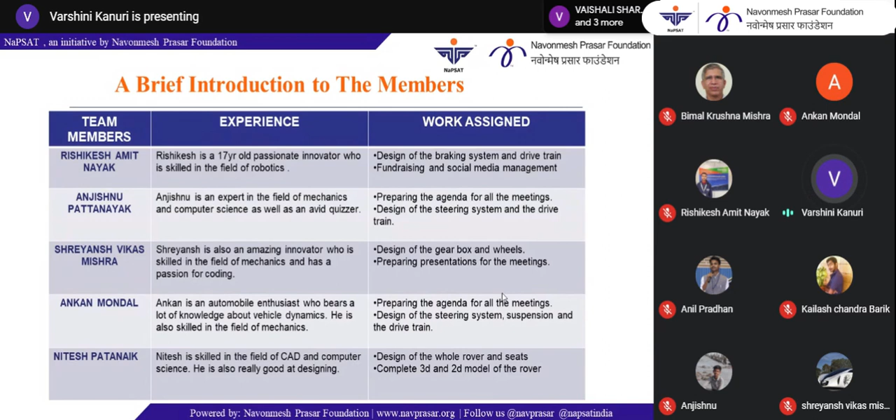Dati Danda Pani Patra. Dati Danda is skilled in the field of mechanics and vehicle dynamics. He is an expert in welding and fitting. Currently, he is designing the framework of the rover along with researching about the material suitable for the rover.

Kailash Chandra Barik. Kailash is also an expert in welding and fitting. He too is knowledgeable on vehicle dynamics and mechanics. Currently, he is designing the framework of the rover along with researching about the materials suitable for the rover.

Tanvi Mallick. Tanvi is an innovator who is experienced in the field of robotics. She is an orator as well. Currently, she is preparing the presentations for the official and unofficial meets, along with communication with the other teams.

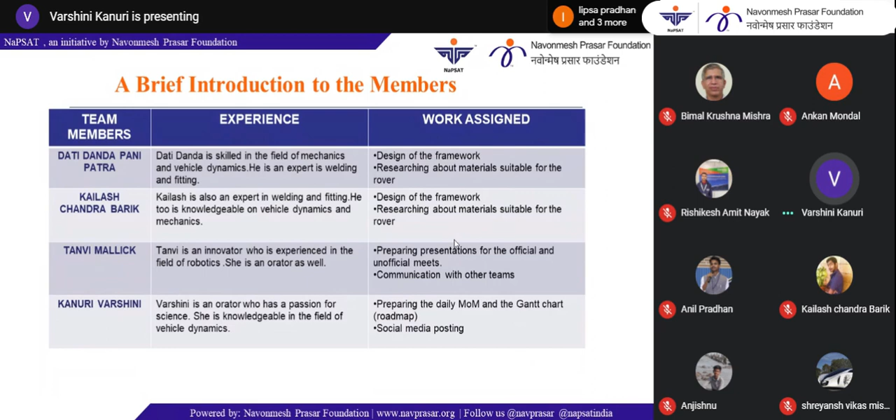Lastly, it's me, Kanuri Varshini. I'm an orator who has a passion for science and astronomy. I'm also knowledgeable in the field of vehicle dynamics along with some components like gear and wheels. Currently, I'm preparing the daily MOM and the Gantt chart along with social media posting.

So here's a list about the team's requirements along with NASA's requirements. Starting with our requirements: weight 127 pounds, folds 3, brakes 4, assembly time to be determined, turning radius 13 feet, fender 169 square inches, seat belt airplane-type waist seat belt.

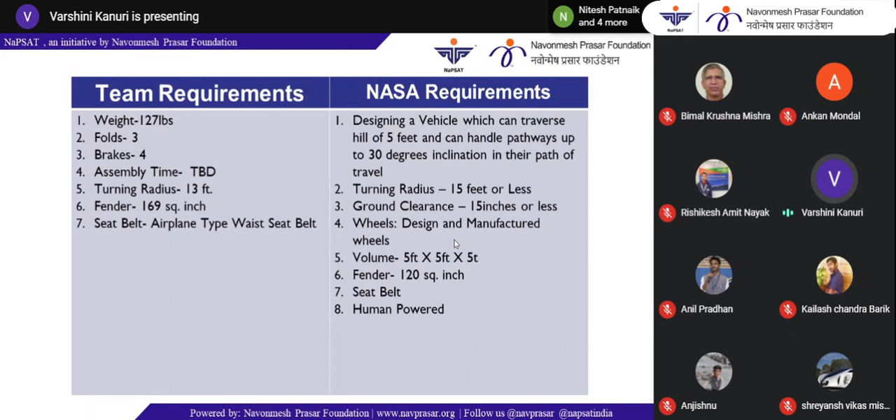NASA's requirements: designing a vehicle which can traverse a hill of 5 feet and can handle pathways up to 30-degree inclination in their path of travel. Turning radius 15 feet or less. Ground clearance 15 inches or less. Wheels designed and manufactured ones. Volume 5 by 5 by 5 feet. Fender 120 square inches. Seat belts, and must be human powered.

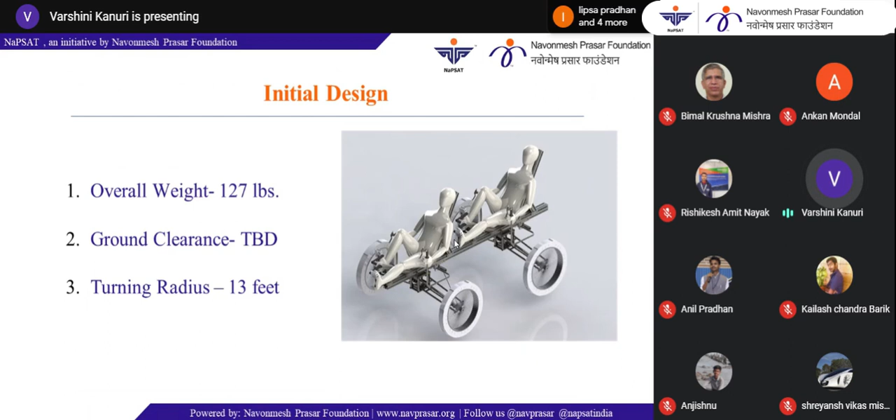So here's the picture of the initial design of our rover, along with the overall weight, ground clearance, and the turning radius as discussed earlier.

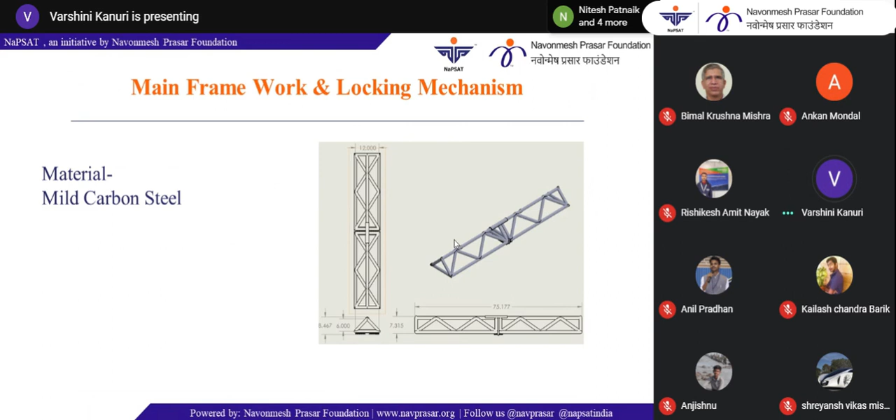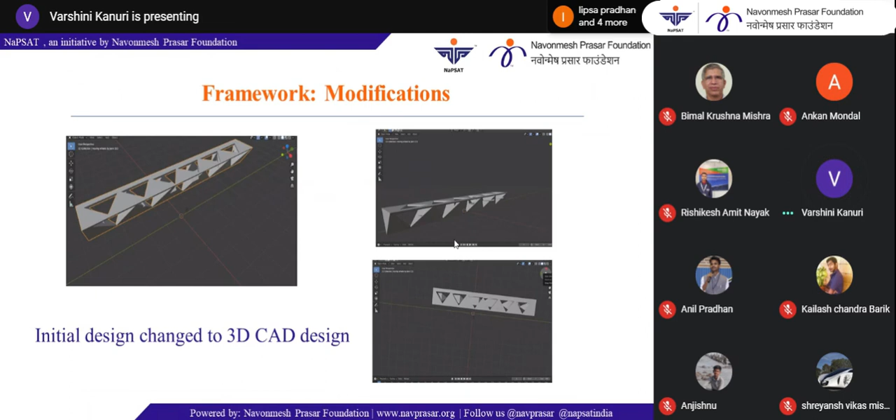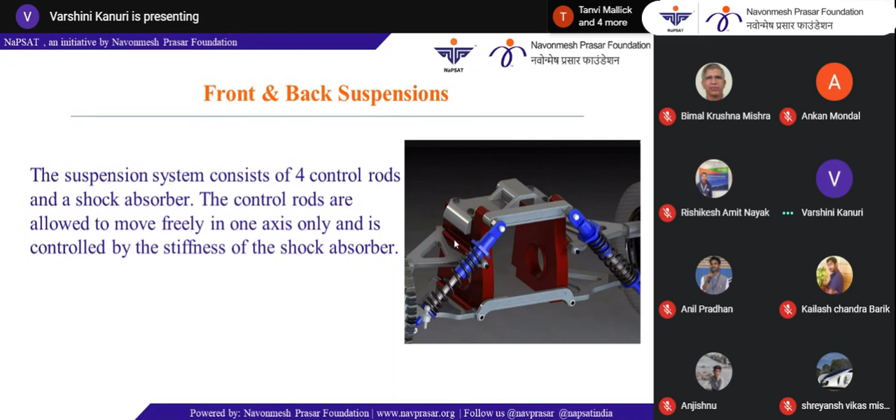Front and back suspensions. The suspension system consists of 4 control rods and a shock absorber. The control rods are allowed to move freely in one axis only and are controlled by the stiffness of the shock absorber. A picture of the suspension system has been displayed in the PPT.

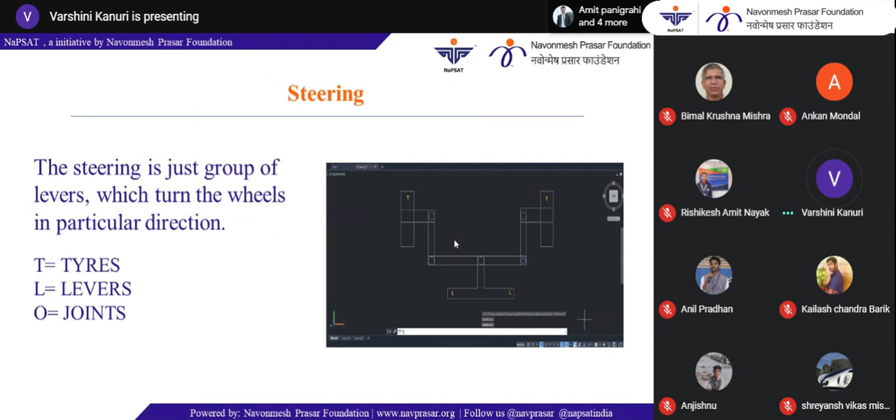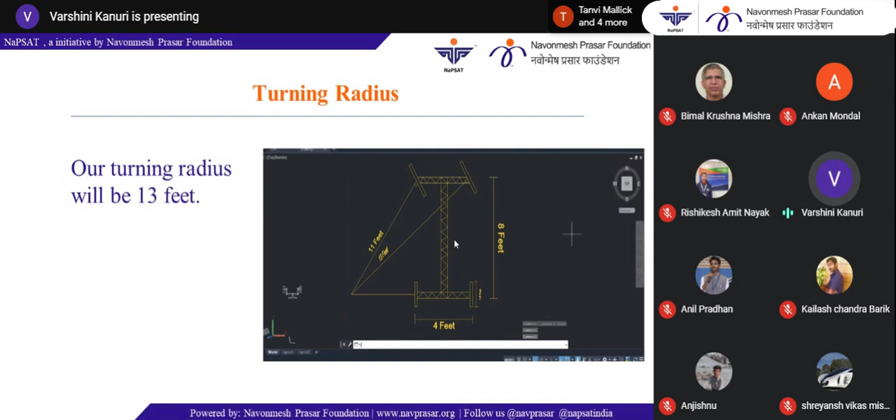Steering. The steering is just a group of levers which turns the wheels in a particular direction. As described in the picture, the letters T denote tires, L the levers, O the joints that are to be fitted into the rover. Our turning radius will be 13 feet. A calculative measurative picture has been displayed here.

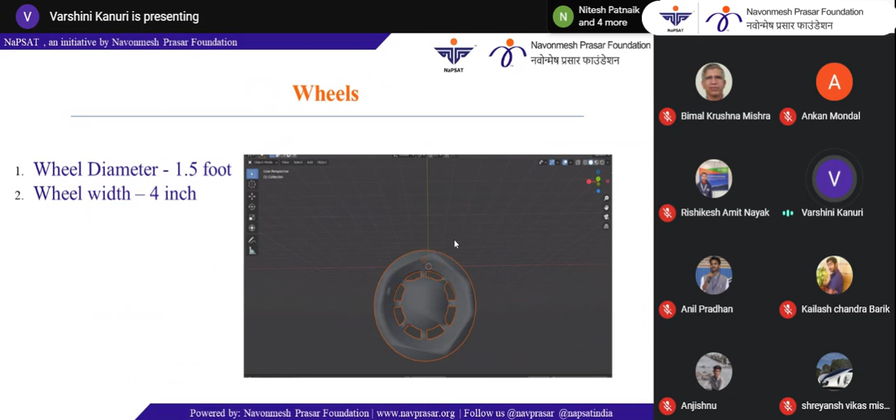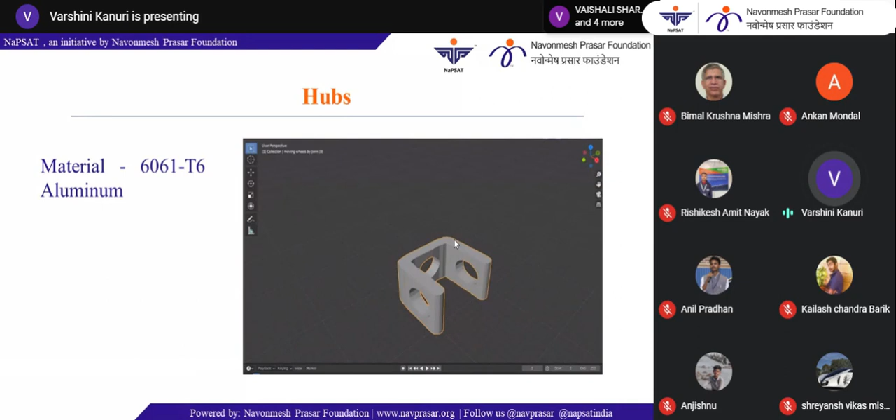And here comes the safety belts. As everyone knows, safety first, everything next. So for the safety, we will be using the in-flight seat belts.

Braking system. For the braking system, we are using a combination of disc brakes for the front and horseshoe brakes for the rear for the complete efficiency.

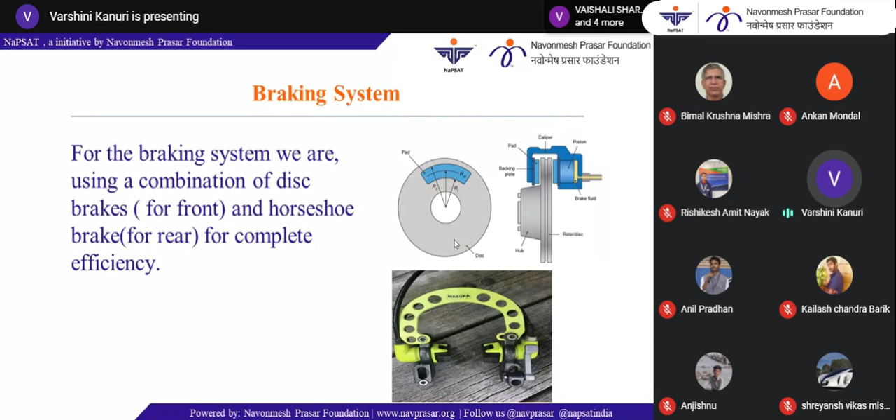As very well known, a goal without a plan is just a wish. So here's the schedule of the entire tasks that our team will be following throughout the year and completing this mission. Pointing out the important tasks, deep research will be taking approximately 4 days for the complete analysis and research about the vehicle dynamics.

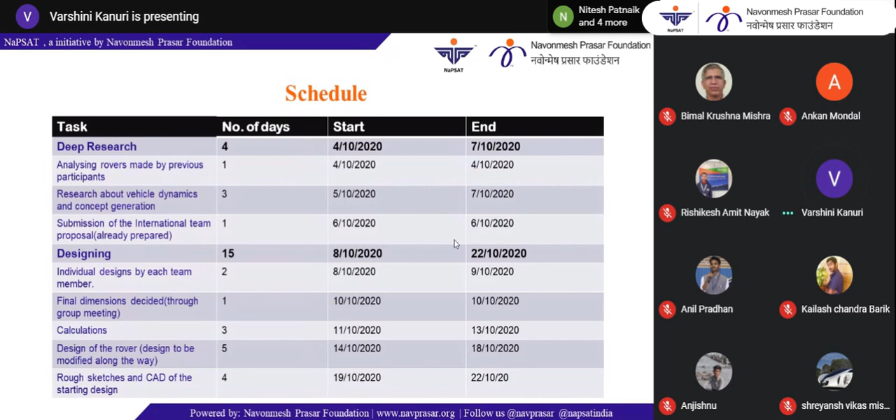Designing will really require 15 days, including the decision making on the dimensions, calculation, rough sketches. The days needed is 30 for the design and dimensions of the frame and for choosing the materials that should be used for the frame.

Suspension will require 30 days for the materials to be used for the suspension along with the assembly and FEA of the suspension. The drivetrain will require nearly 22 days for figuring out the way to cover the chain, along with the assembly and finite element analysis of the axle.

Design review submission due. Steering will be requiring nearly 8 days for the materials, assembling, and finalizing the design.

Wheels will require nearly 43 days for finalizing the design and fabrication. Seats and safety will require nearly 20 days for designing the seats, fabrication, and the storage system.

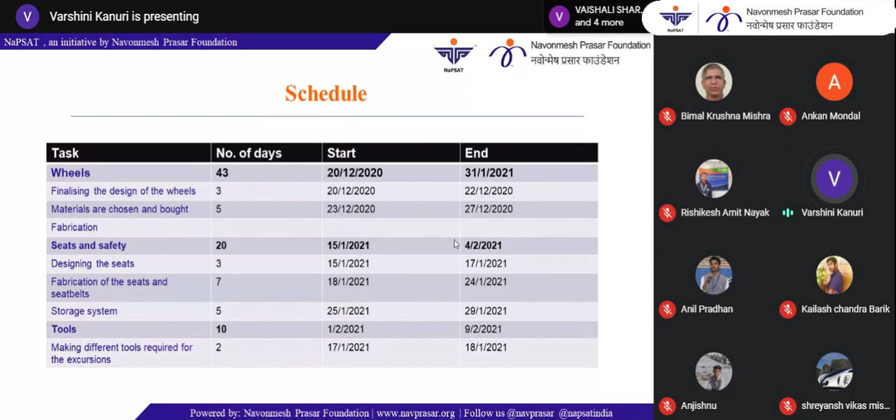Tools: nearly 10 days for making the different tools required for the excursion. Testing will require nearly 15 days for testing through simulations, real-life testing, and fabrication. Troubleshooting will nearly require 10 days for fixing the parts that don't seem to work well.

Finally, the completion of the rover, shipping, and everything else. So here's a brief of the timeline that I will be reading out. Deep research: researching about the structural dynamics, previous analysis, and the vehicle dynamics.

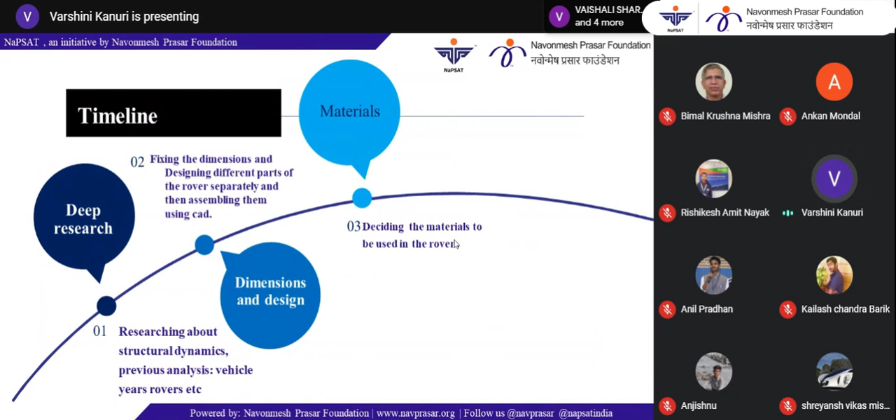Dimensions and design: fixing the dimensions and designing different parts of the rover separately, then assembling them using CAD. Materials: deciding the materials to be used in the rover. Calculations: going through structural analysis again and doing mathematical calculations.

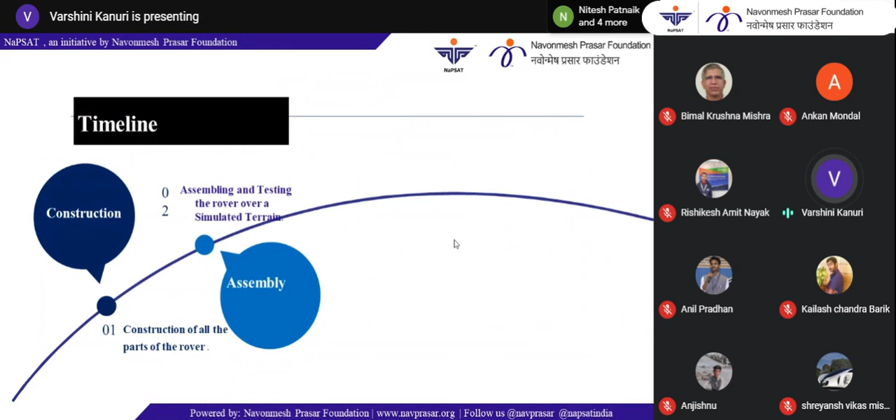Construction: construction of all the parts of the rover. Assembly: assembling and testing the rover over a simulated terrain. Troubleshooting: fixing all the parts of the rover that don't seem to work properly. Deassembling the rover, packing, and shipping of the rover.

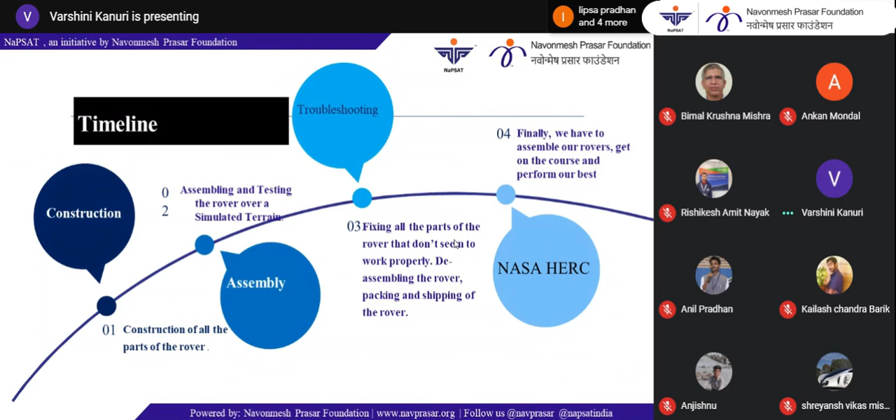NASA HERC. Finally, we have to assemble our rovers, get on the course, and perform our best.